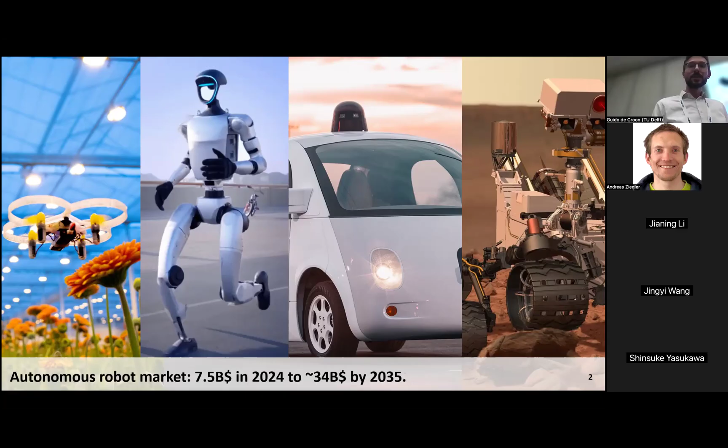I'm going to speak about tiny drones as a showcase for neuromorphic AI. I guess that everybody here knows and hopes and believes that robotics is booming. I found some numbers on these economic foresight websites, like apparently 7.5 billion in 2024 and a 34 billion market for autonomous robots. And a lot of this is powered by AI. I'm not telling anything new to you here, but of course AI is really important and we want these robots to become smarter and more capable.

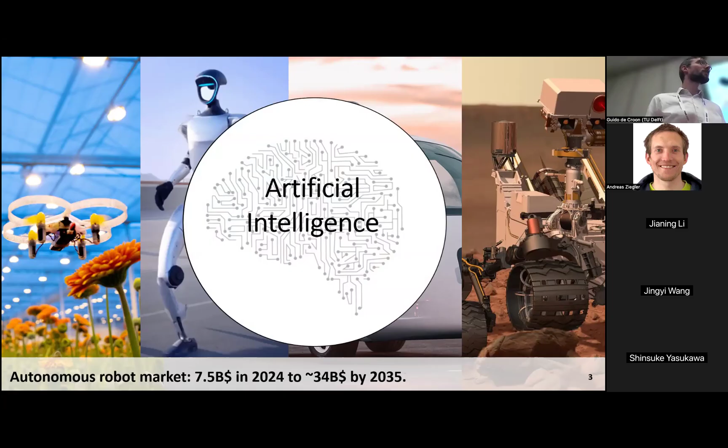But the problem, of course, is that AI typically is quite heavy and power hungry. I want to illustrate it a little bit with drones. And to be honest, I just want to show this video. Normally, if you think of autonomous drones, then we think of these quadrotors. What you will see here is two quadrotors. One is powered by AI, so it has our code on it. The other one is the exact same drone, made by an organization in Abu Dhabi of this drone race, and it's controlled by a human.

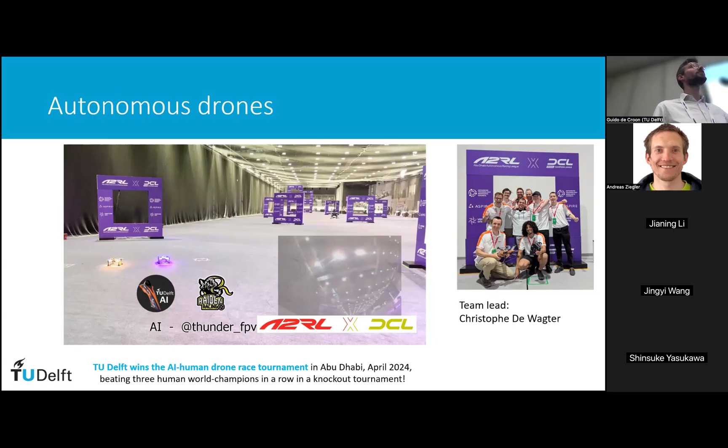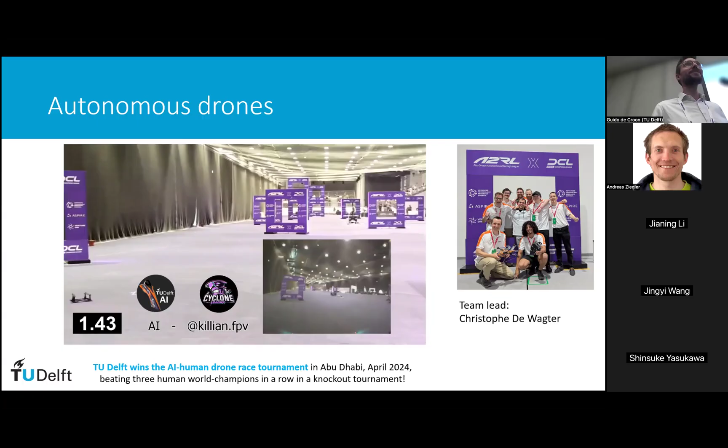This was last April, and it was the first real competition between humans and drones, with a knockout tournament. So if you lose, you're out. Let's have a look at how we fared. The human took off quicker, and then our drone actually overtakes it in the first lap. It's going quite fast, around 100 kilometers an hour. The human got a little bit stressed, flew into the gate, and we finished the lap. This was the quarterfinal. We did also a semifinal and a final, which you can watch at your own leisure, but in the interest of time, I'm going to continue.

If you look at this drone, which again was made by the organizers, it's around 700 grams. In order to run AI on board, they give it the NVIDIA Jetson Orin NX, which weighs 50 grams. I made it red because I think it's heavy. Why do we need the Orin? Mostly for the vision. We have a pretty big vision network. Actually, we made it really small to fit on the Orin compared to computer vision people, but I would find it big. It's running at 90 hertz to detect gates, which we need because we need to fly through them.

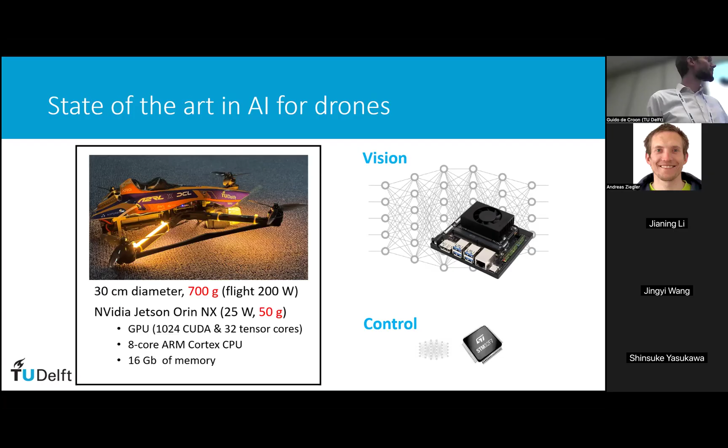So why was the drone so fast this time? Because the control was also done by a neural network, but it's really small. That's why you almost don't see it on the slide. It was running on an STM, a little microcontroller, and it was going from the state, so where the drone is, to the motor commands directly. This really made it very, very fast.

But I would like these flappers to be intelligent because they can fly in greenhouses. They're super safe for humans, so even if they hit them, nothing will happen. If you're hit by our racing drone, then you have a big headache or concussion, and I hope you survive, right? But if you're hit by this thing, and we actually accidentally hit someone in the face with it, nothing happened. That's why we want them to be intelligent as well.

In order to do so, we hope that the promise of neuromorphic AI is going to come true. I guess most people here know this promise very well, so I'm going to be a little bit quick about it. Why does it promise to be very efficient? Because it mimics animals' asynchronous and sparse sensing and processing, which can save you a lot of energy, but also makes the brain and the way we sense much quicker.